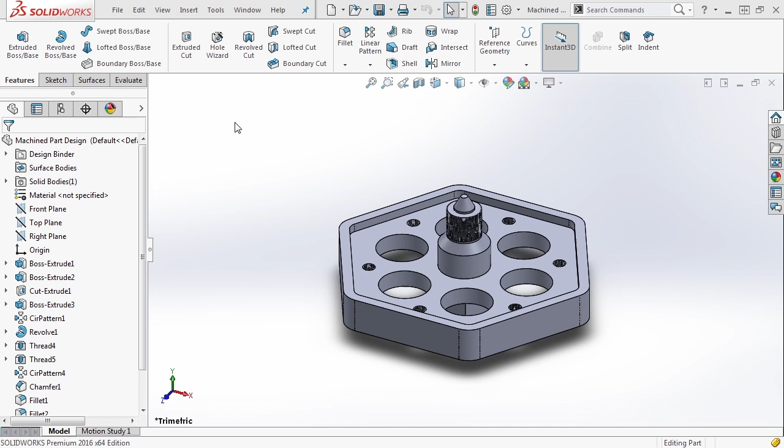Now let's get started with our file and let's create some views of our own. Again, we're going to start with the machined part design file open. We'll go to our new dropdown and make a drawing from part and assembly. We're going to select our drawing millimeter template and say OK.

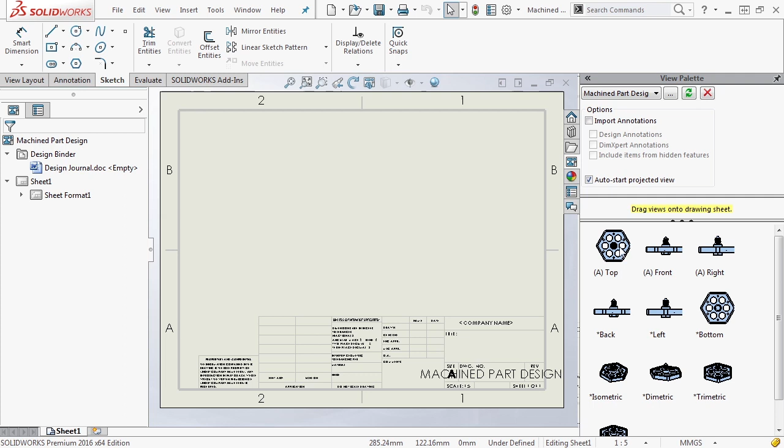Now we're going to have the view palette open, but we're going to click on the auto show option to pin it open. It automatically moves our window. We can fit the sheet to screen and we can start creating our views. I'm going to drag the top view. I'm going to auto drag this view here and I'm going to say OK. Now once I do, I'm going to select the pin and automatically allow it to hide our task pane.

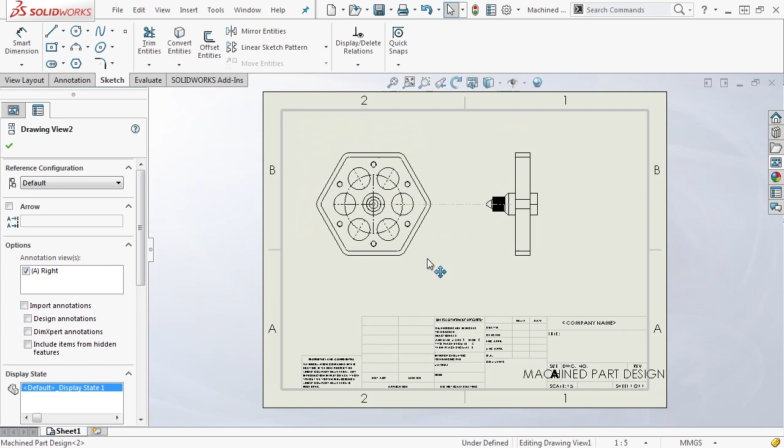Now from here, we have two views, and currently those views are linked. This view here that was projected can only move left and right because it's linked to the parent. The one on the left can move in any direction, and you'll notice that they float together because they are technically locked. Now this is a great option, but you can also undo the lock if you wish.

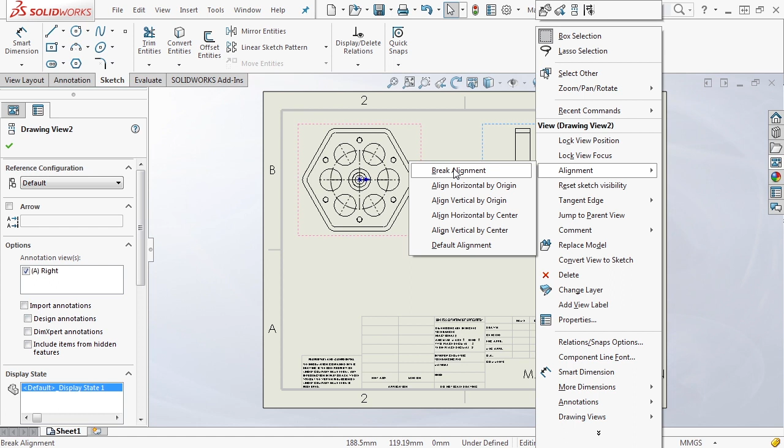You can right-click on your selected view, and you notice that we have lock view position, lock view focus, and under alignment, you can break its alignment. So there's a few different ways that you can modify and manipulate your view if you want to align them or unalign them with certain other views. We're going to keep our views aligned for now.

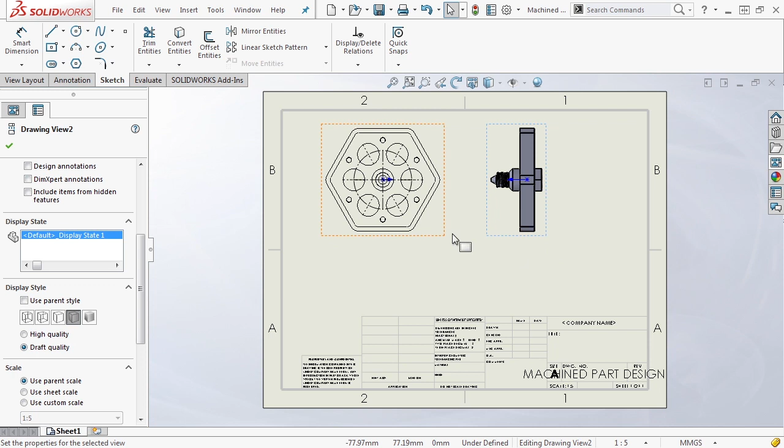Now, once we have these views, we can select them and modify any of the properties we want also. We can go back and modify its display, for instance, but you'll notice that as we do that, the parent and child relationship holds true. If we go to the projected view, notice that we can modify its display state individually without having to affect the original drawing view or drawing view 1. For now, I'm going to keep both of them as hidden lines removed and say OK.

You'll also notice that in our tree, in addition to sheet format 1, which we looked at originally, we also have drawing view 1 and drawing view 2. If we expand one of these, you'll notice that we see the machined part design SOLIDWORKS part document. We can expand it and we see its entire tree here. Now, this is very handy if you want to do things like show a sketch that's hidden, access some of the geometry, or maybe even get information about things such as the Thread 4 and Thread 5 feature.

If we right-click on these, you notice that we don't really have an edit feature inside of here. So while we can see this information, we don't have a quick way that we can get in and edit this inside of the drawing file. But you can right-click on the file, and you can go ahead and open the part, or open the part in position. So this is a very handy tool to use, especially if you have an obscure position or you want to add some reference sketch geometry at the drawing level or at the assembly level that you can use inside of the drawing file.

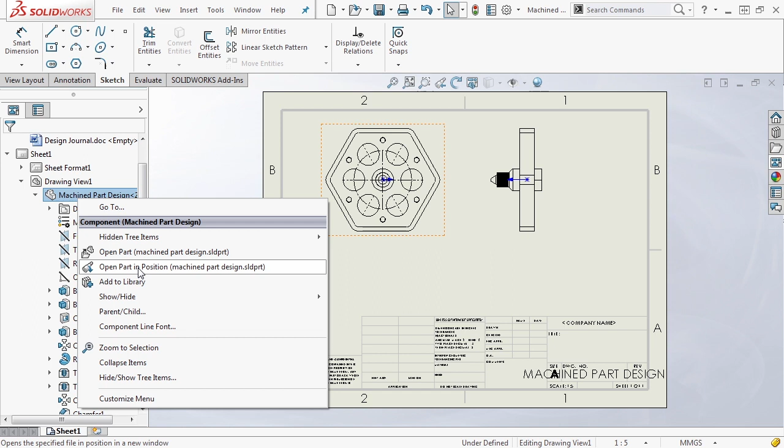So if we say open part in position, you'll notice our file is already open, but it goes and it moves the part into the same view that we're currently using. Let's go back to our drawing sheet. Let's look at adding a few more views. From the top section, let's go ahead and select our View Layout tab, and notice that we have 3 standard views, which automatically creates them based on the first and third angle.

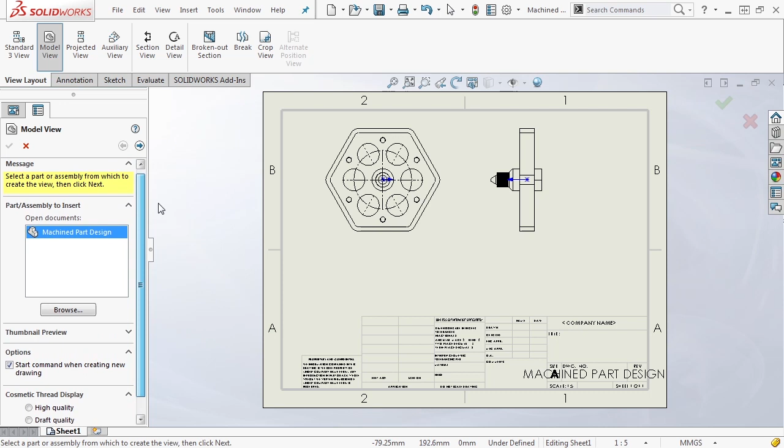We have a Model View, which allows us to manually insert another individual view, just like we did originally. We have Projected View, which allows us to select a current view and create a projected view based on it. Now this allows us to pull it in any direction and get an isometric view or a straight view off of it. And hit Escape to get out of that.

You notice that we have an auxiliary view. Now this allows us to add a view by unfolding a new view from a linear edge reference. So we can select a reference edge and notice that it automatically pulls it out.

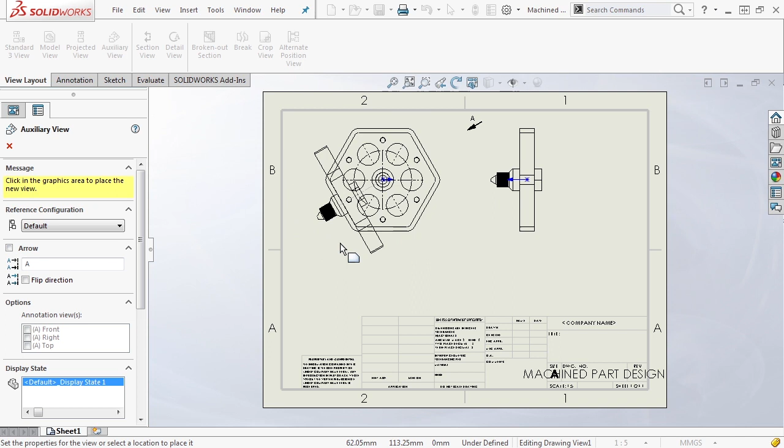So this can be handy when your projected view doesn't get the exact same orientation that you're looking for, especially on parts that have edges like this, where we want to make sure we have a very specific viewing angle.

The next section we have section view and detailed view, and these are going to be very important to you. Section view allows you to do a few different things. You notice first you can select section or half section. So these are some handy options, especially when you're dealing with parts like this that are revolved.

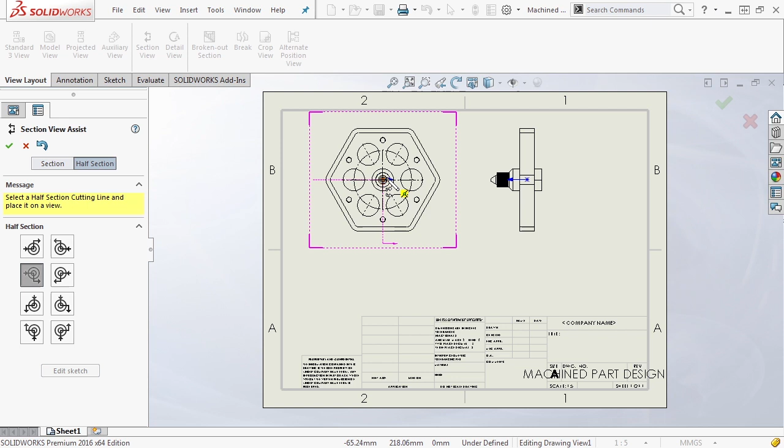You notice that we have a preview on the screen of where the line is going. You can select the directions and orientations of the cut. For instance, if we want to cut through this direction, we say OK, we drag this over, and you can see the resulting cut. Now you notice the line comes in here, goes down and over. So what we're seeing is a cutaway of this section right here.

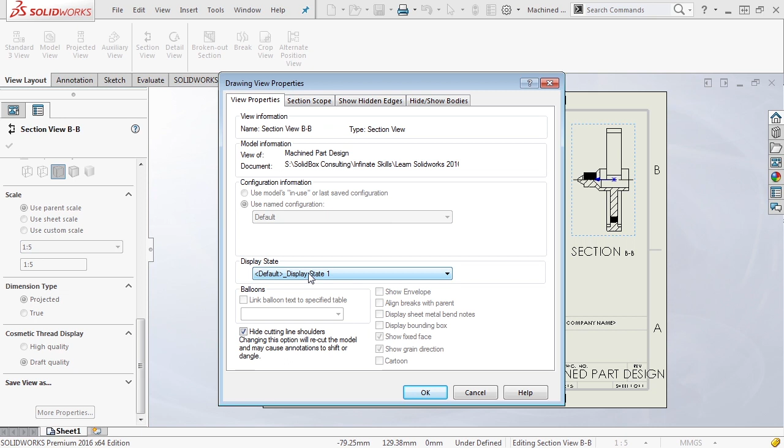Now we can always go back in there and we can modify it or we can delete that section simply by selecting the view. So you notice that we can flip the direction and change the way this is oriented. We can modify the view itself, and we can go into more properties, which gives us the view properties for things like the display state, which we could directly link to. We could hide the cutting line shoulders. We can also go into the section scope. If we have multiple parts, we can choose to exclude certain features.

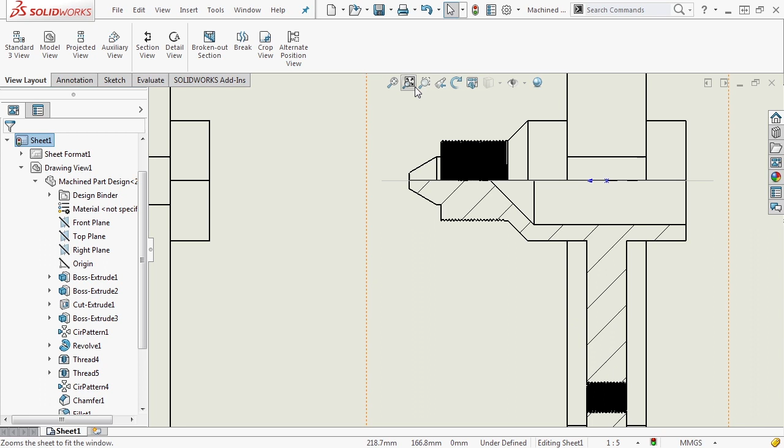Now, once we say OK, you'll notice that we now have the original projected view and the section view in the same orientation, showing a cutaway of the part. So this allows us to see details such as the inside of this part where it's hollow without cutting away the entire thing. But you might be wondering, that might be a pretty small view, especially on this drawing. What if we needed some more detail?

Well, now we can go into the detail view option. We can draw a circle, and we can have a detailed view of a certain area. Now you'll notice that we have some options: detail circle per standard, broken circle, with leader if we want that information, and so on. We're going to do per standard. We're going to scroll down. We'll do a full outline, and we're going to modify the scale.

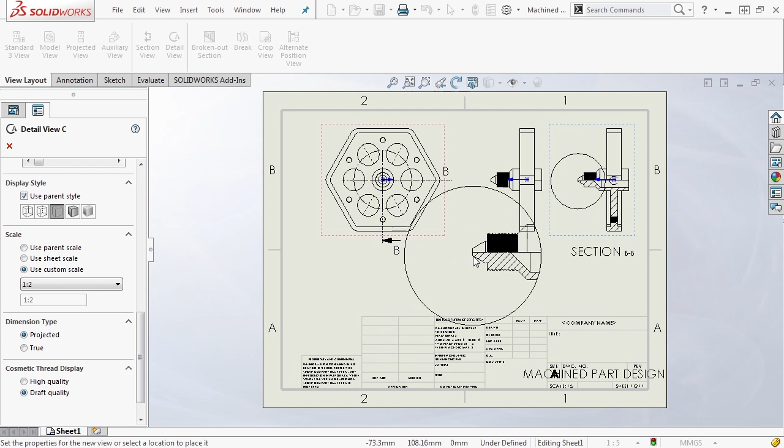So you notice when we do a 1:1, it's a little too big for this drawing. So we can go down and do a 1/2 size, and you notice that it doesn't really fit very well anywhere. If we scroll back up, we can turn off the full outline, and we can still get that section view with the detail on it without having to obscure too much of the information. We say OK, but you'll notice that it puts the detail down here. We might need to move some of the markers around so we can actually see them a little bit better.

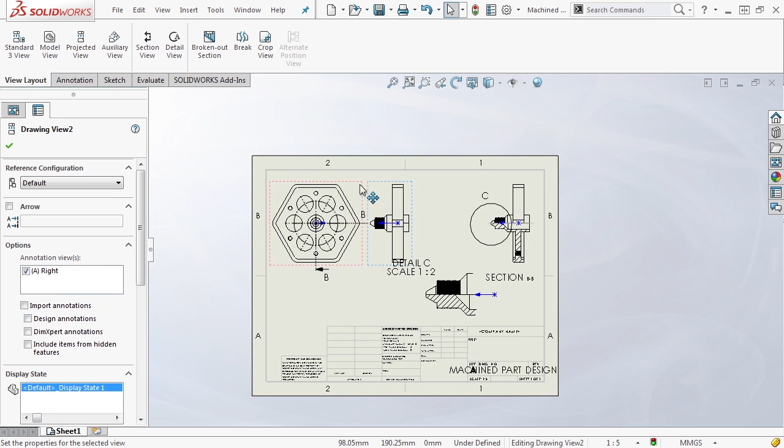So currently we have our original view. We have our section view showing the B. We have our detailed view showing the C leader, and we have our original projected view. Now again, at any point in time, we can move these around, and the views are linked together. So because the original view has both a projected view and a section view based on it, these will automatically move together. Then we can take our detailed view, move it off to the right, and now we have a nice orientation of all these different views.

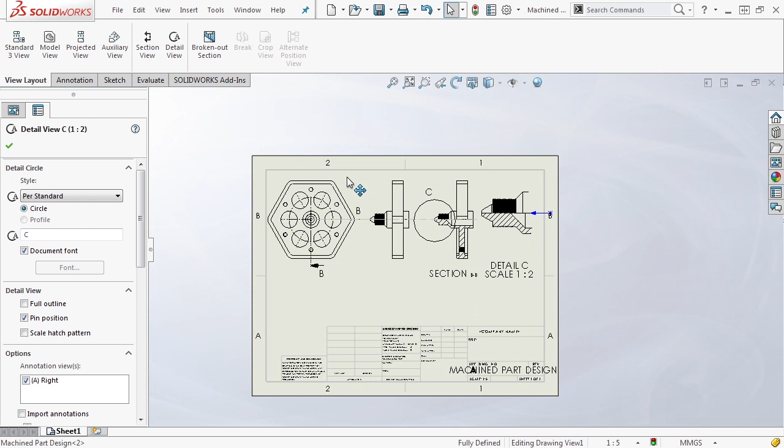And again, these are not linked to the point where they can move the original view, but the original view can be moved up and down to link those together. We could also select views, right-click, and we could lock them together. For instance, if we wanted to lock the view position, you notice that now everything is fixed and it prevents people from moving them around.

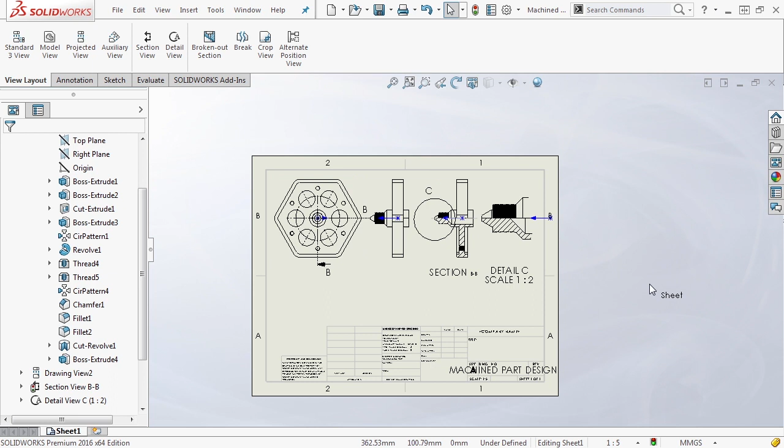If we select them, right-click, we can unlock the view position, we can right-click and align them horizontal by origin. So now all these views are perfectly aligned, even though this one wasn't originally set to move with it. But see, now everything moves in line, and we have a very nice progression of detailed information. There are many different ways that we can create views, so we'll expand on some more options that we have in the next video.